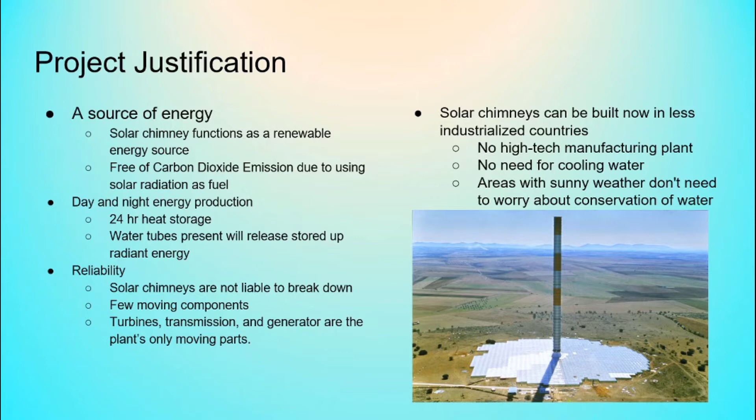These solar chimneys are a reliable source because there are few moving parts. The only moving parts in a solar chimney are the turbine, transmission, and the generator. Another benefit of a solar chimney is to provide power to less industrialized countries. These chimneys are not high-tech. The chimneys do not need cool waters, and areas that are too hot do not need to worry about water waste.

A drawback to a solar chimney is the height, which determines the conversion efficiency as well as increases the initial cost of construction as well as maintenance. As mentioned before, there are three essential elements, which are the solar collector, tower, and wind turbines. The collector takes advantage of solar radiation by heating up the air, which then travels through the tower. As air passes toward the tower, it powers the wind turbine at the center. The material used for construction is very minimal for developing countries, which makes a solar chimney a good choice for an alternative power source.

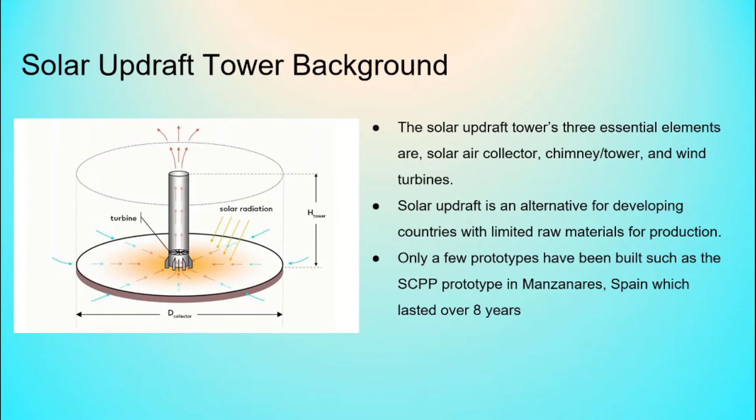Only a few types of chimneys were tested, including one prototype built in Spain which lasted for about a decade. Solar chimneys will have a constant supply of air since the collector is open at the base. As stated previously, hot air passes through to power a turbine and to obtain energy. Solar chimneys are not only renewable because of air flowing into it, but also because air is an infinite supply that is also released from the top of the chimney. The power that the turbine is obtaining is also dependent on the orientation and position the turbine is located in the chimney.

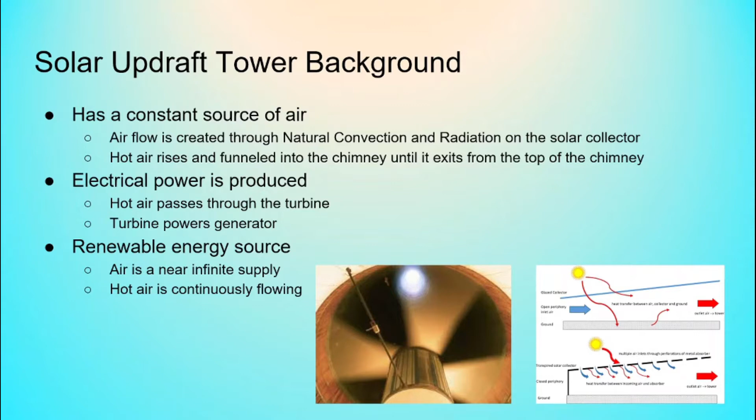Our goal for this project is to design and test our solar chimney. The test would include the mass flow rate of air and the power that the turbine can supply. A couple challenges that we faced for our solar chimney were changing over the course of working on this project. The dimensions cannot be too big, even when using ANSYS, which will be explained later. The mass flow rate was going to be difficult to obtain as well. For our prototype, there is the use of research papers and computer programs. The main programs that we used were SolidWorks and the student version of ANSYS.

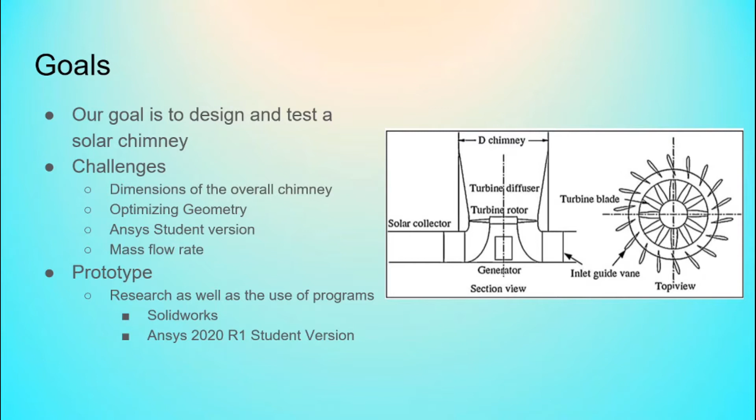These are some design restrictions based on industry. The Manzanares prototype gave an overall output of 44 megawatt-hours in a year. Sadly, companies view this as too little power output to warrant this as a dependable energy source. The resources cost too much, and land may be more important for other uses, such as housing or for companies.

The lifespan of solar chimneys is difficult to pinpoint. There is always the initial cost of building a solar tower. Then there is also the price of maintaining said tower. Gravity can cause the tower to break if ultimate compressive yielding is met. The land, however, can also double to grow plants, which allows for another very good resource, being food.

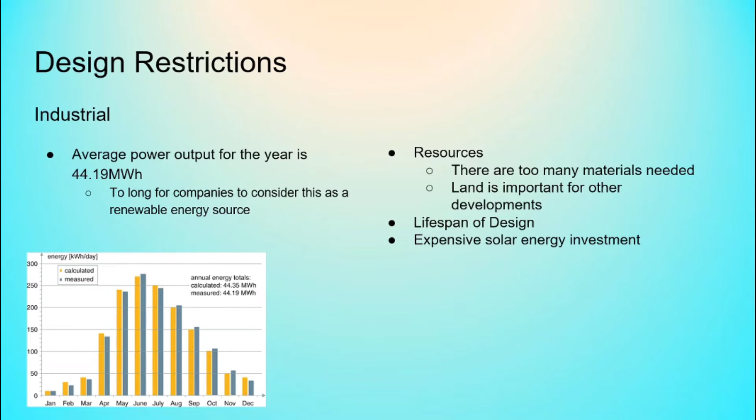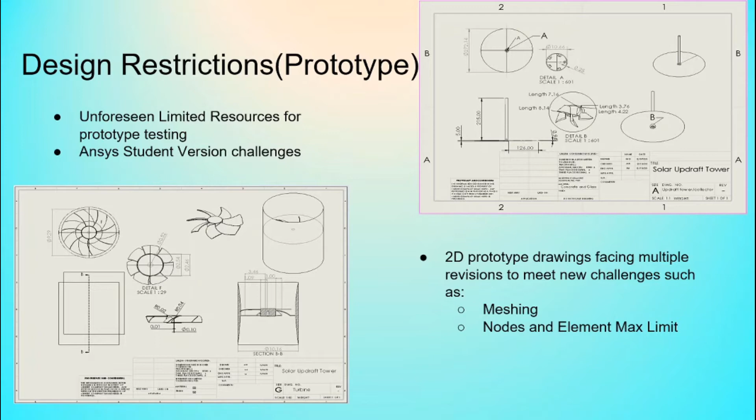With the use of ANSYS, we wanted to increase our model to be able to go full scale, which would increase the tower height to be around 1,000 meters, and the diameter would be equal to, if not greater than, 1,000 meters. Using the student version of ANSYS, however, we had to decrease the dimensions to be similar to that of the prototype that was built in Spain, and that still came with its own difficulties. These difficulties were the meshing of the model and the limit that the student version of ANSYS had for the nodes and elements. The images on this slide have our final dimensions for our prototype. The left one is the final dimensions for our turbine, and the image on the right is the final dimensions for our chimney.

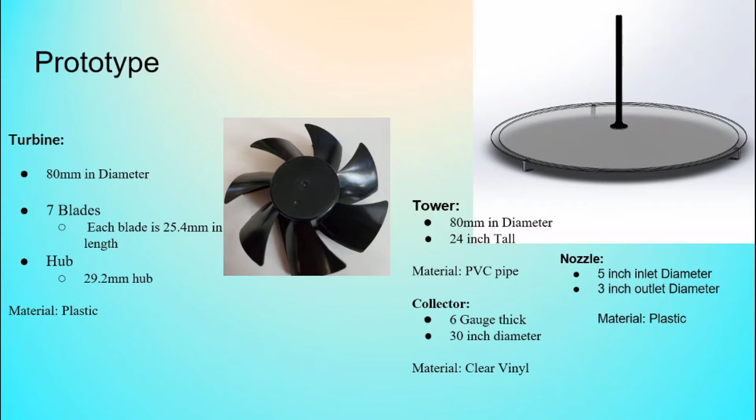On this slide, we have our initial design for our prototype. Our turbine, which is on the left, would have been a computer fan. Our tower, which is on the right, would be made of a PVC pipe. Our collector would have been made of clear plastic.

In order to successfully attain finite element analysis, meshing is a very important step that must be taken to ensure proper results are being obtained. For the solar chimney's natural convection and radiation parameter, a high-quality mesh is required to perform our analysis. However, after testing several meshes, the number of elements and nodes had to be reduced due to the student version ANSYS limits, by enlarging the size per element on a mesh.

However, this reduction brought down the overall quality, which gives us a poor volume ratio between the nozzle and solar collector. The nozzle specifically suffered from obtaining a quality mesh and fails to generate any further thermal analysis through ANSYS Fluent. As we continued to investigate and research, we found that a hexahedral mesh was the best way to perform ANSYS with our model.

Unfortunately, this mesh is only available through ICEM CFD commercial license software, which our student version did not give us the ability to use. We tried to build a similar mesh in hope that Fluent Analysis would accept it and let us run analysis on our model. However, we kept running into issues with the student license we had.

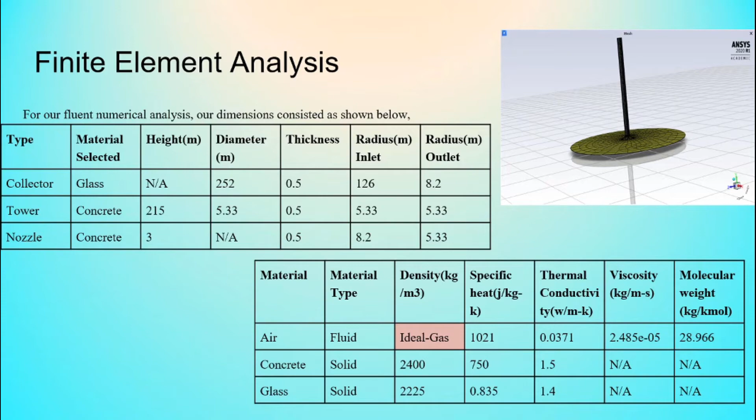The table on the bottom right shows each of the properties of the materials that would be used in our tower. The air is the air that is flowing through the material. The concrete is what the tower and nozzle are made of, and the collector is made of glass.

In order to investigate the mass flow of air, temperature, and density across various locations of the tower, the first assumption is that air is treated as an ideal gas. That is because the solar updraft tower energy begins with natural convection and then changes between hot air and cold air density, so the mass flow of air depends on the changes in density between cold and hot air. A negative gravity of 9.81 meters per second squared on the y-axis is placed.

The radiation model was also configured to a surface-to-surface analysis due to the enclosure of the geometry in order to study the orientation and energy transfer throughout the three body parts. In order to limit the computational analysis as much as possible due to the student version, we increased the clustering model to 4 faces per surface in order to reduce the amount of faces being simulated for energy data.

As shown on the slide, we placed a thermal boundary on the solar collector wall with natural convection and radiation, which is the first table, and only temperature boundaries for the other walls. You can see we put the heat transfer coefficient, the free stream temperature, the external emissivity, external radiation temperature, internal emissivity, and wall thickness.

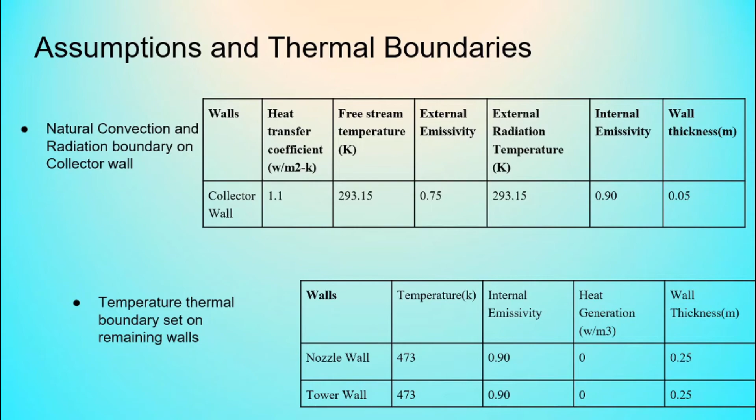There are only temperature boundaries for the nozzle wall and the tower wall, which show the temperature, the internal emissivity, the heat generation, and the wall thickness.

The objective of the design was to build a prototype with a smaller scale version of the dimensions used from the Spain prototype solar chimney tower, in order to test its turbine efficiency at different locations of the tower. A turbine was to be placed in different locations of the solar tower to study the turbine's potential power generation and efficiency. The efficiency was assumed from theoretical models used by various researchers, since no running prototypes were available to gather data.

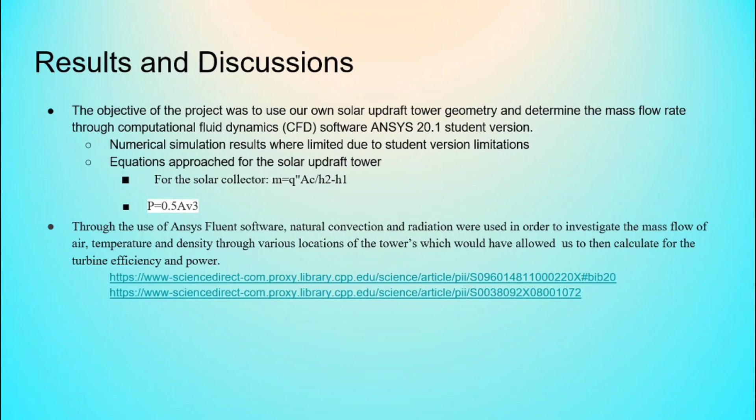ANSYS would also be used for computational fluid dynamics to determine the mass flow rate. Again, there were limitations due to the student version of ANSYS. The two equations shown on this slide were for our analytical values. Experimentally finding the mass flow, temperature, and density of air throughout the tower would have been very useful, because this would have allowed us to calculate the turbine efficiency and power.

Once the mass flow rate is solved for, we assume the mass flow rate is the same going into our turbine. P in is the air pressure about to enter the turbine. H is the head loss due to the turbine. P out is the air pressure that exits the turbine. It also happens to be the pressure that enters the chimney. For the chimney, we found a modified Bernoulli equation.

With these three equations, and there are more equations, about 14 in one of the reports we used. Once the unknowns were solved through ANSYS and an engineering equation solver, the unknown values will then be compared with published data.

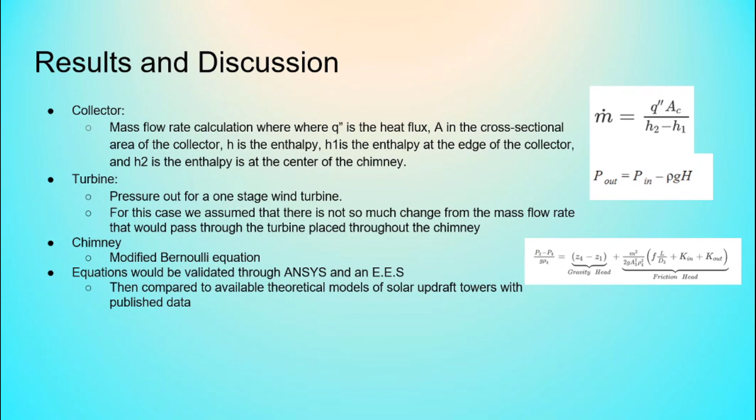Determining the price of this prototype was very difficult, since this prototype would be in Spain. The land would cost about $372,000. The turbine, solar chimney, and transporting these materials would cost over $600 million. This initial pricing is what most people look at when determining if a solar chimney is worth building.